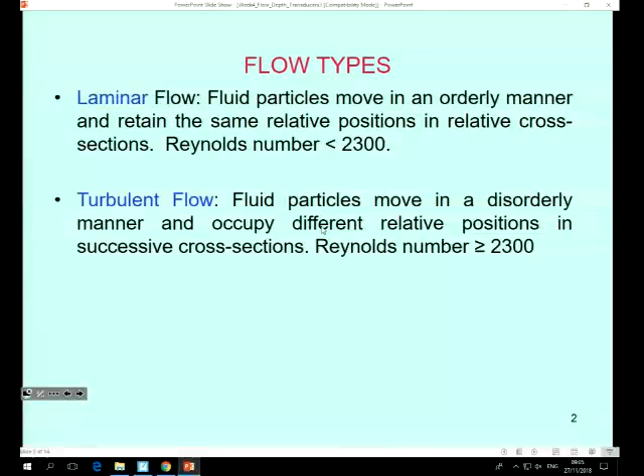And then you've also got turbulent flow. So the rig downstairs, have you used it to look at that? So you can make the rig downstairs show you laminar flow or turbulent flow. You can inject a dye. Turbulent flow just means the particles inside the fluid are moving around in a more random kind of manner, and you can see that sort of turbulence in the water. It's just like what it sounds. And that's with a Reynolds number of greater than 2,300.

And the Reynolds number is directly proportional to the velocity, the diameter of the pipe that it's flowing through, the density of the fluid, which is that symbol rho, the little p sign, and the viscosity of the fluid, which is mu. Is that always mu? Is that the right symbol? Viscosity? I didn't think it was. No, it's not, is it? It's something else normally. Okay, I don't know where I got that from. You might see that as a different symbol, that mu thing.

But anyway, just out of interest, viscosity and density are not related to each other. Some people might think a dense fluid is always going to be more viscous, or vice versa, but you can quickly remember that by thinking of oil. If you pour oil and water, obviously the oil is going to flow more slowly, so it's quite a viscous type of liquid, whereas the water is going to flow quite fast. But then again, if you mix oil and water, what happens to the oil? It sits on the top, so it's obviously less dense, yeah? So that's a good way to remember that there's not really a relationship between density and viscosity. It doesn't follow that because something's dense, it'll be more viscous. Oil's a good example of something that doesn't meet that sort of thing.

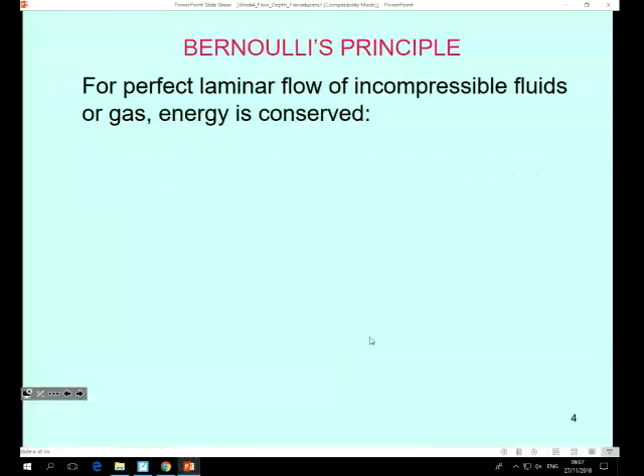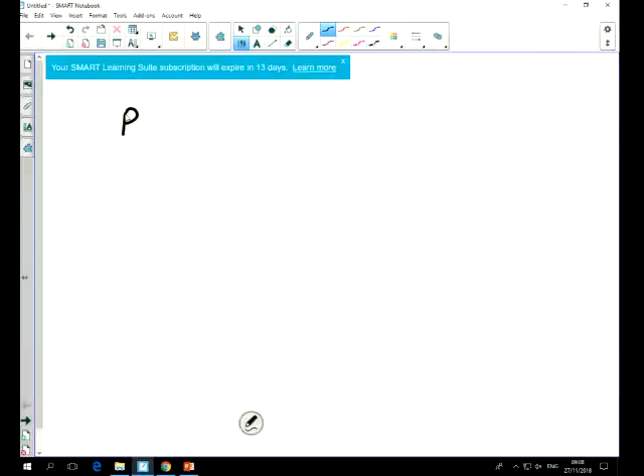I don't know if I've seen that one before. So you can actually derive Bernoulli's formula. There's a few different forms of it. That's one form, but a more useful one. So you've got the pressure energy - that's just in terms of energy - pressure energy plus potential energy plus kinetic energy.

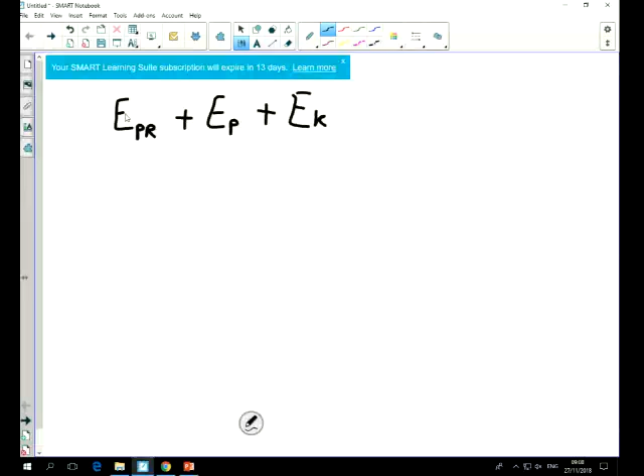So pressure energy is like force times distance - that's what we'd give you for that. So force times distance. If you think of a little bit of fluid in a pipe here, if it's got cross-sectional area A and it moves that distance, then the volume of that little bit of liquid is area times distance, isn't it? So we can rewrite that as distance equals volume over area. Is that right?

Equals area times distance. Have I done that right? Volume equals area times distance. Yeah, that's right. Yes, you could rewrite that force. So that's one equation. And then the second one is that pressure equals force over area.

So you can change that F to being that P, force over area. I think I've done that wrong. Volume equals area times distance. So to get rid of the area, you can write that like that, yeah? Force over area times area just gives you force. Then you've got the distance, which is...

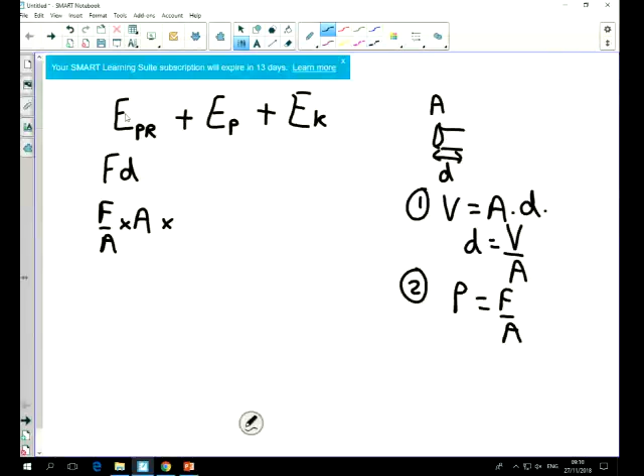Oh yeah, that is right. Sorry, volume over area, yeah. So this is all just to do with this first term here. Right, then we've got the potential energy, which we're used to seeing as mass times gravity times height. Most people know that, yeah.

And then we've got kinetic energy. Anybody know the equation for kinetic energy? Half mv squared, yeah, right. So we've got the last one, and where v is velocity this time, so I'll write it like a wee u - and that's volume, that's velocity. So the little green thing's velocity, the big black one's volume.

So then we can rewrite that. These a's will cancel out. Force over area is pressure, so that's pressure times volume plus mgh. I should have done it in red, but never mind. That's a half mv squared.

This is all to do just with the energy on one side, yeah? So let's say the energy in, pressure in, volume - the volume stays the same, so it doesn't really matter whether you're talking about the volume coming in or the volume going out, so we'll leave that. Height of the input and velocity at the input.

And then the other thing we know is that density is mass over volume. So rho equals mass over volume. So we can replace the volume, the mass parts with rho times v. So you end up with P1 plus rho g H1 plus a half rho v1 squared. So you can do that derivation - you don't really need to learn that though.

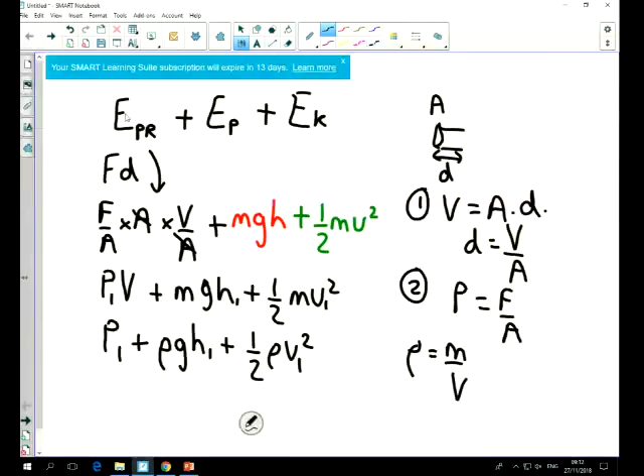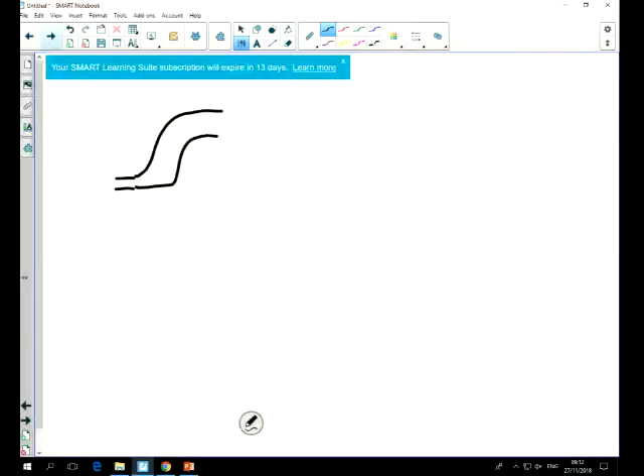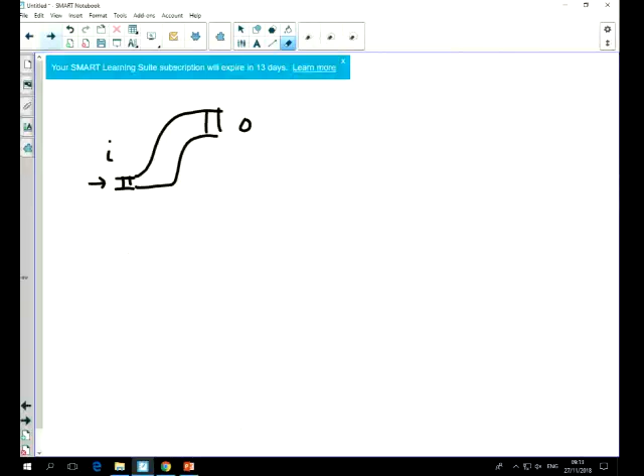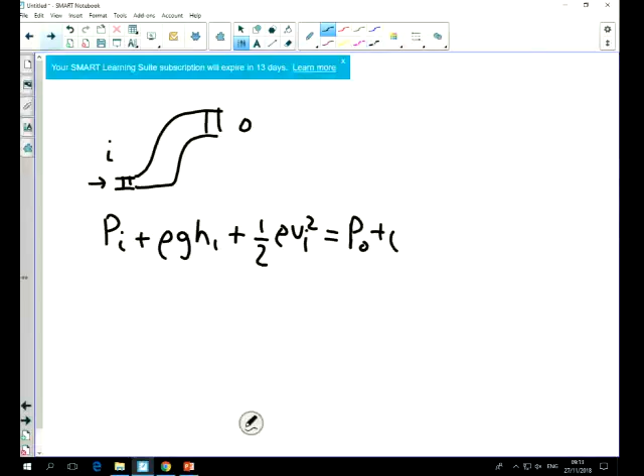But anyway, so that's on one side, and then you've got the same on the other side, and that's Bernoulli's theorem essentially. Due to energy conservation, if that's the input and that's the output: pressure in plus density times gravity times the height at the input, because obviously there's a change in height, plus a half rho v squared at the input, equals the same at the output: pressure out plus rho g h out plus a half rho v out squared. And that's Bernoulli's formula.

And that's kind of the basis on which the instrumentation for flow measurement is based, because quite often you'll be looking for a pressure difference. I'll explain that a bit better in a minute as well. Oh right, yeah, you know more about that anyway, won't you? You'll have done loads of this stuff.

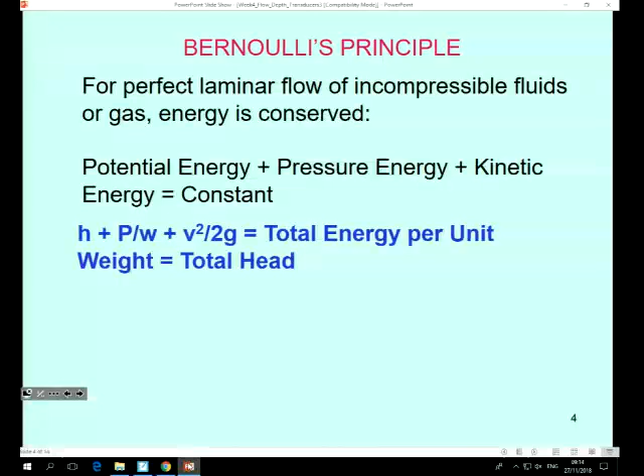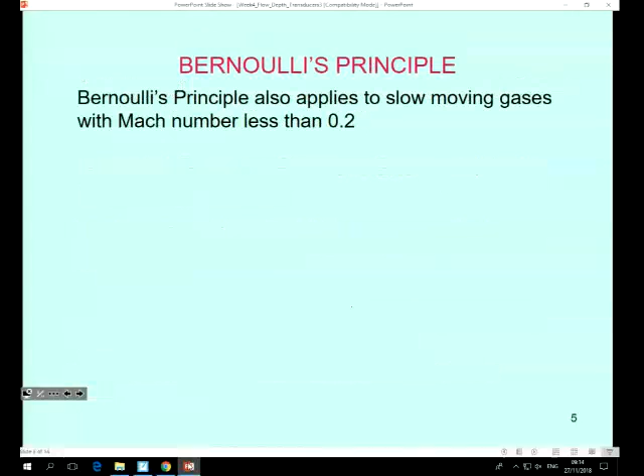It also applies to slow-moving gases, but the speed has to be below a certain Mach number, less than 0.2. I can't exactly remember what Mach number is... it's the speed of sound in gas. That's 1 Mach.

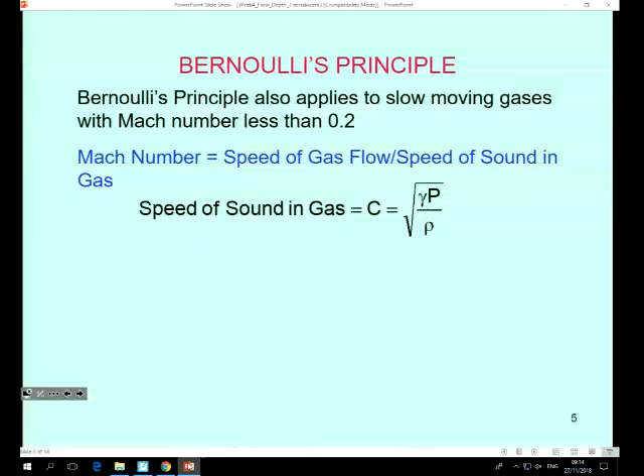Anyway, we don't really need to know too much about this stuff. It's just explaining the units that are used. Pressure's measured in newtons per metre squared. That's the same whether it's liquid or just general pressure. We know that already.

This little symbol here is gas density, so air has a density of 1.4. That's just to do with how many atoms there are in a certain volume of gas. When you're talking about density, you're always talking about number of atoms in a given area.

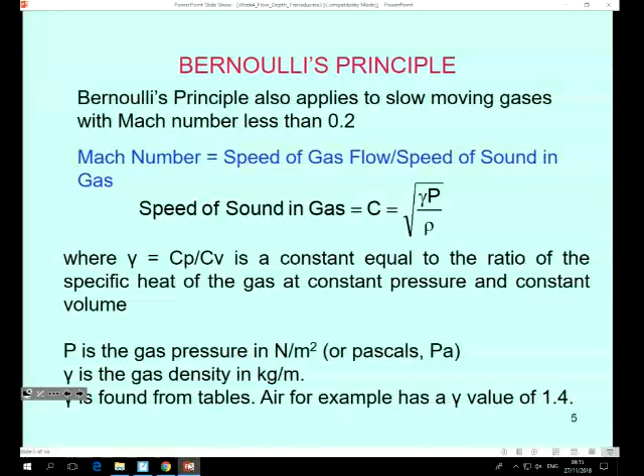So we don't really need to care about that, or this. I'm not very sure why all this stuff is in the slides, but just so you're aware, Bernoulli's formula only applies to laminar flow, slow speed, so Mach number less than, I think it was 0.2 or something, and no friction. So no friction, but of course there usually is friction.

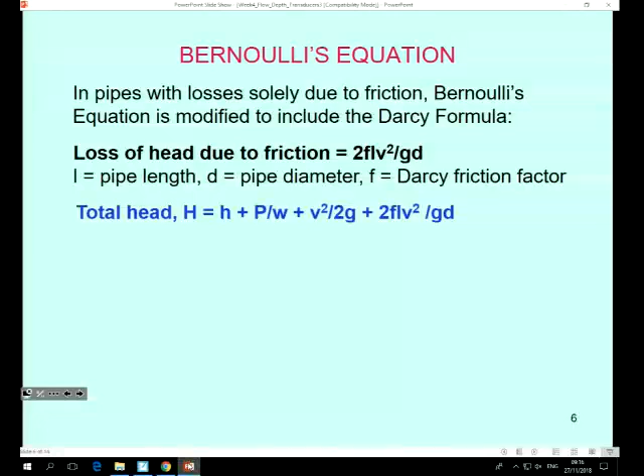If there is friction in the pipe, then you have to add this Darcy formula. People doing ventilation systems or cooling systems probably have to take all this into account, but for this course, you don't really need to because you're not expected to be designing flow systems, just instrumentation for them. So there's a bit of friction, and you obviously just need to add that into the formula for the total energy. I don't think we need to know too much about that.

What's really interesting about Bernoulli's principle, and it might not be instantly obvious, is that a fluid flows faster in a smaller diameter than it does in a larger diameter. That's kind of counterintuitive - I think most people would think it flows faster in the bigger pipe because there's more area for it to go quicker. But that's not true, it flows faster in the smaller area. And because of the energy conservation thing, that also means the pressure drops in the smaller pipe and increases in the larger one. You wouldn't expect that, but that is what happens.

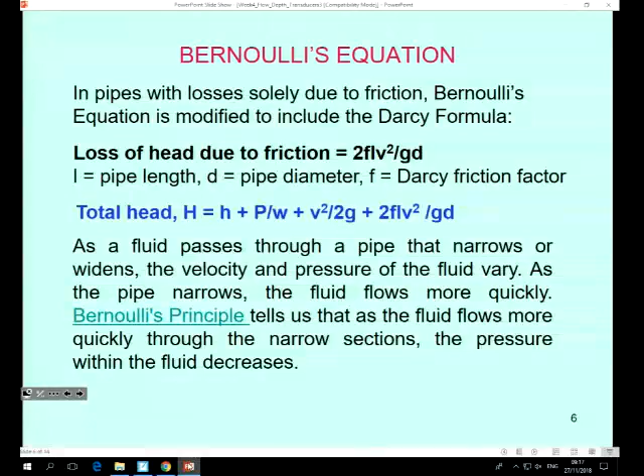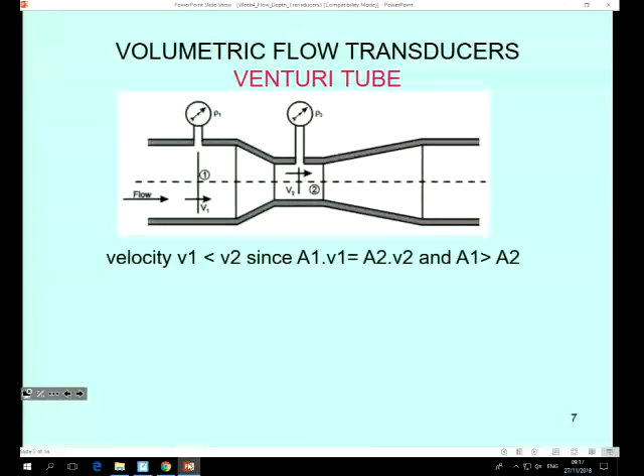So that's how a lot of these flow measuring instruments work - you can put a small constriction in the flow and measure the pressure difference between the large area and the small area, and get a very accurate representation of the flow. V1 is velocity 1, V2 is velocity 2, P1 pressure 1, P2 pressure 2. That's just explaining what I said.

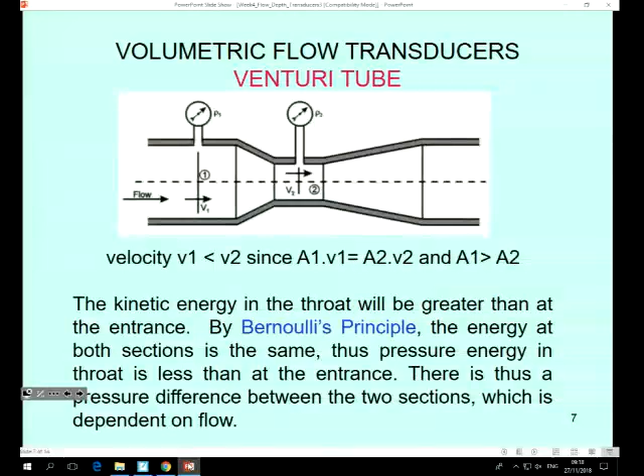So you'll have seen these, like differential pressure meters and things like that. I'm sure there's probably loads of these at Dounreay, because a lot of what you're doing is to do with flow. There's lots of different ways - you've got your electronic differential pressure cells, you've got your manometers which you can just look at. There's other ways of putting the restriction in, things like orifice plates and stuff like that. I've got quite a good slide about that.

There's these Pitot tubes - these were used in airplanes quite a lot in the past. It's just the same idea, using two different diameters to measure the pressure between them. I think there was a plane crashed in South America - they reckon it was because these Pitot tubes froze up, so the airflow couldn't go through them. That's still the same idea.

You can rearrange Bernoulli's formula to get this equation here, where the velocity squared is equal... that's the difference in velocity between the two pressure areas. So the difference in velocity squared is equal to 2 times the difference in pressure over the density, rho. Sorry, rho is density, yeah, that's right, I was right.

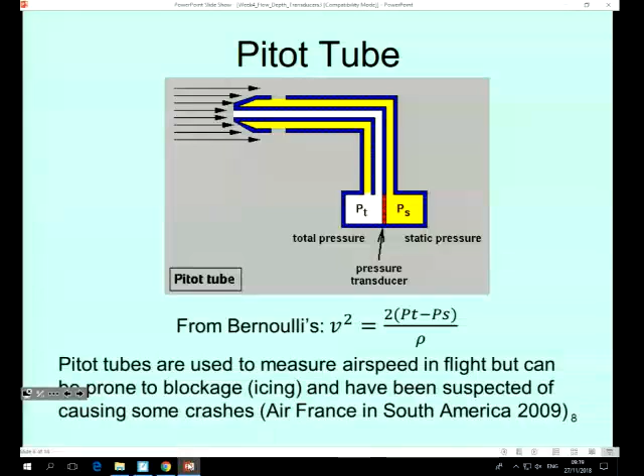Okay, so that's a typical manometer type of one. I don't know if anybody's ever seen them, I'm guessing they're quite old-fashioned now. We used to have some of these downstairs, I used to bring them up, but they've been thrown out now because nobody used them. So you can see how you can measure pressure difference there. I've got a better thing for showing you.

So this is just telling you that there's a direct relationship between the flow rate, Q, and the difference in pressure. And that K is related to the constants, to do with the pipe diameters and things like that.

Right, and this is talking about volumetric flow. I'll talk about that as well. There's some other methods of defining flow. Probably the most common is volumetric flow, so that's the amount of volume passing every second. But you have different instruments for measuring different types of flow.

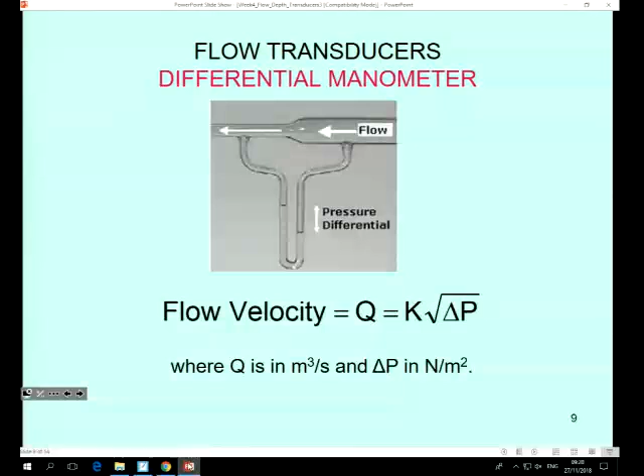I think I'll show you the wee thing now, because the little RLO thing is more interactive and a bit more interesting. Does anybody have any questions about any of those? No? Quite straightforward, isn't it? Okay, straightforward, but you need to remember.

So this is just one of these Wisconsin Online things, which I always think are quite good. I should say, if you've got any problems with any subject and you want a wee bit more visual information, WISC Online is quite good. They've made loads of these little reusable learning objects, they call them. I think they're quite good for learning, because they've got good pictures and things to show you what's going on.

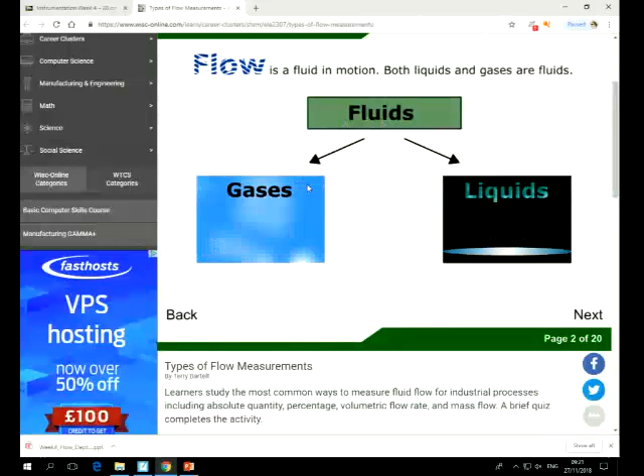So just a wee bit about flow there. We're talking about fluids, but they could be gases or liquids. Yes, the definition of fluid includes gases as well. The thing that causes flow is obviously going from a high pressure to a low pressure. You don't get any flow if there's no pressure. Now the pressure could be something like a pump pushing the fluid through, or it could be gravity. Gravity also gives you a pressure. But you won't get any flow if there's not a pressure of some kind being applied.

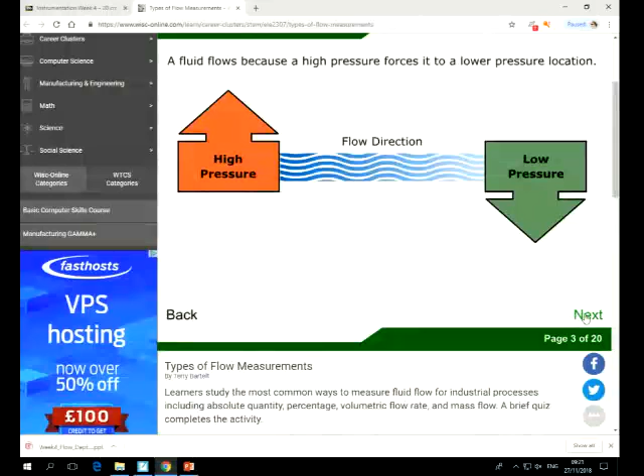So that's just a wee thing, that's just what I said. It could be either pressure from a pump, or it could be gravity, which is also pressure.

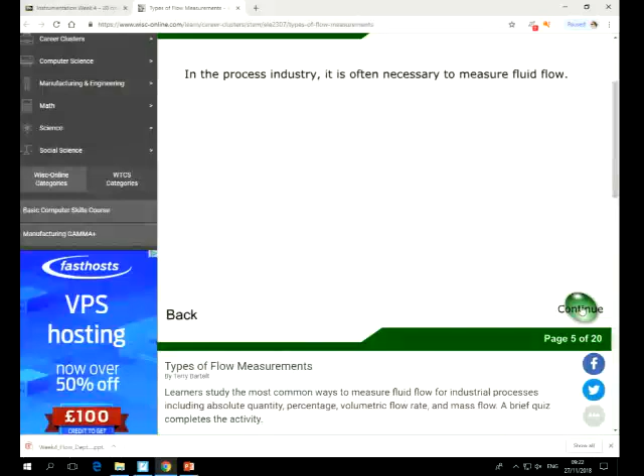So obviously you need to measure flow quite a lot for loads of things, everything from your car cooling system to your big process industries, pipelines, oil pipelines - what's the flow rate through them. Mostly I've been involved with cooling units, so that's the thing I'm most aware of, but there's obviously a lot of other fluid flow as well besides just cooling fluids.

So we've got all these different types of measurements. Like I was saying, there's different types of flows. You've got absolute quantities, which doesn't bother about time, it's just measuring a volume flowing from one side to another. You've got percentage flow rate, which is what it says, it's percentage compared to our normal flow rate. Volumetric flow rate, which is the one we looked at, which is volume per second or volume per minute or whatever. And then you've got mass flow rate, which is mass per minute or mass per second.

Okay, so you've got different instruments depending on what you're measuring. Did you know that you had different measurements? That's something you've come across before? No? Okay, so you've got absolute ones, which are quite straightforward. You just fill up a quantity and then release it, and you know how much has flowed if you do that. So that's the absolute ones.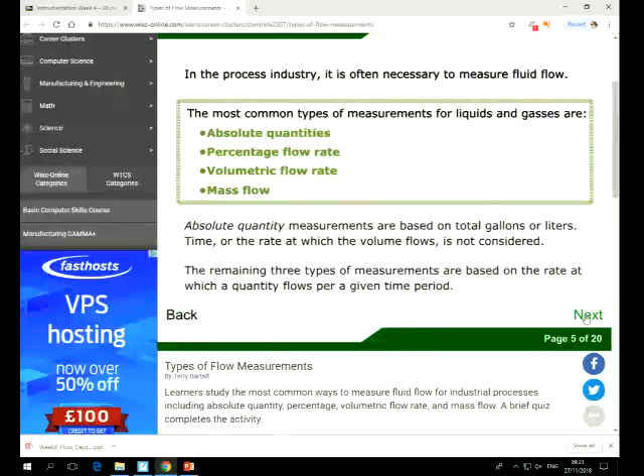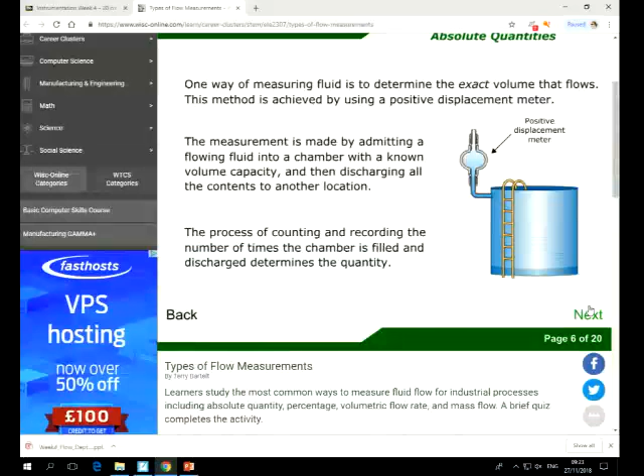And the rest are based on the rate of time, or use time as well. So it's quite straightforward. If you're doing the absolute quantities, you can fill up a tank and then discharge it to another location, and you know how much you've discharged, yeah? And there's quite a lot of flow meters that work on that principle. I think the ones you have for your gas in your house do work on the same principle. So this one does - it fills up this volume here and then discharges it through there, and you can obviously measure that volume, or you know what that volume is.

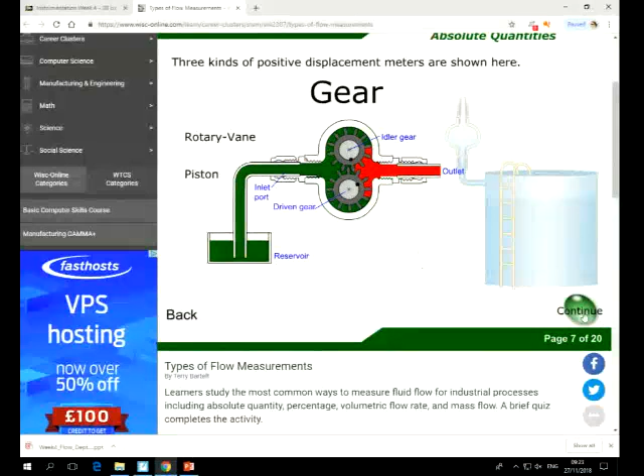Same with that one as well, it's also doing the same thing - it's a specific volume coming in here and then going out there. And that's just the same idea with a piston. So like I said, these are quite common, I think, for gas measurements, but maybe not so much for liquids.

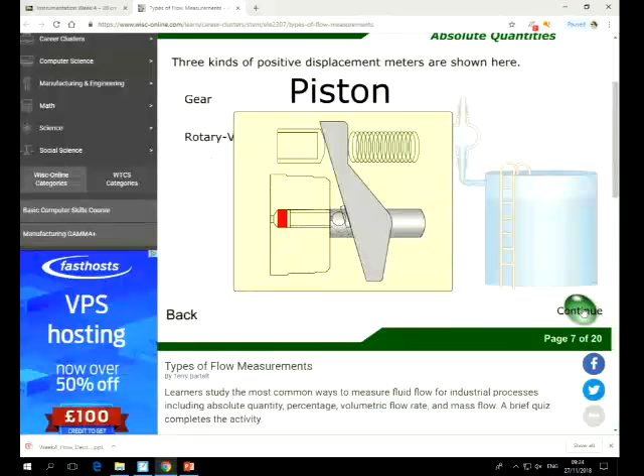Just got some applications there, measuring quantity of additives to add, or transferring something between two tanks. Obviously you don't want the second tank to overflow, so you need to know how much you're actually putting into the next tank.

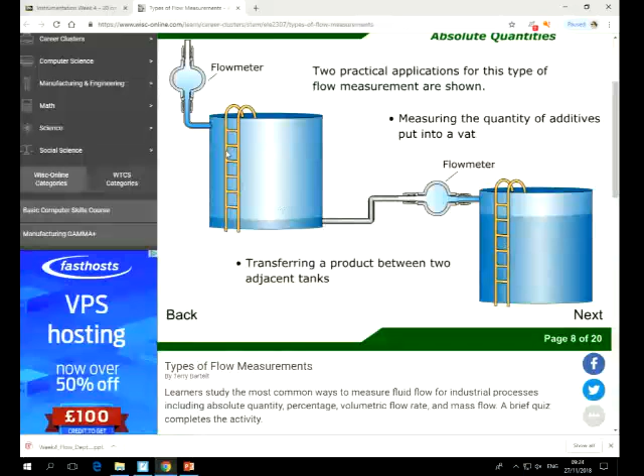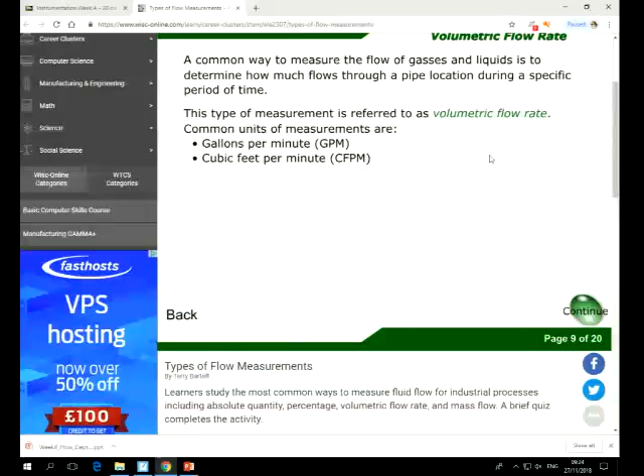And then the other way, which is probably more common, is measuring over a period of time. I think this must be American, because I don't think we use gallons per minute or cubic feet per minute. We probably use meters cubed or millimeters cubed per minute or per second. But obviously there's a whole range of different measurements, depends what you're talking about.

So some applications prevent a high flow rate. It could also be to assure a specific flow rate, as I say, again, for cooling.

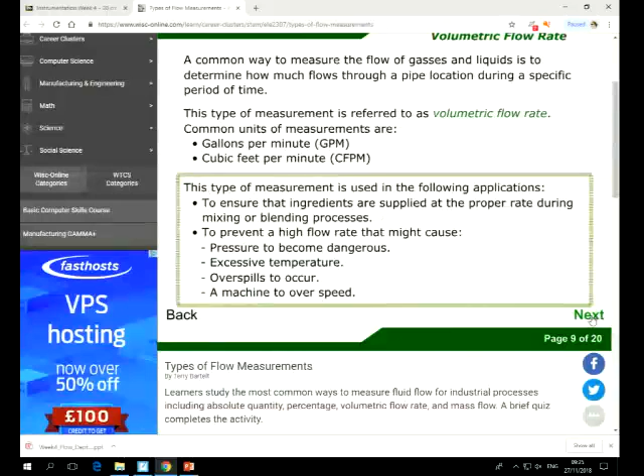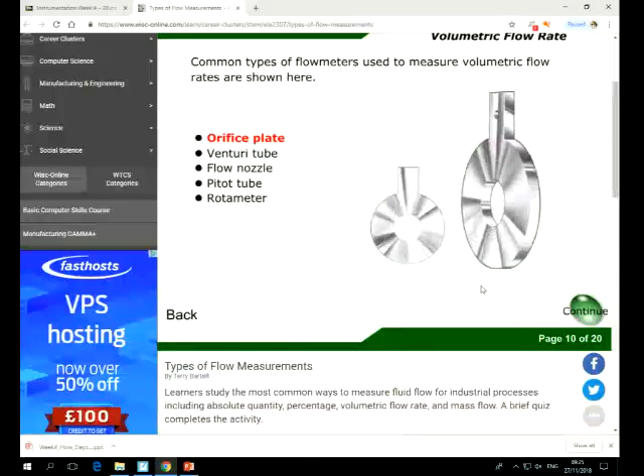The more common one is the venturi tube. I suppose orifice plates are quite common as well. The nice thing about an orifice plate is it doesn't require a length of pipe - it's just something you can insert into the pipe, which is good. The disadvantage of these sort of things is that you have to actually access the fluid. So if it's a contaminated fluid or a corrosive fluid, these methods are not so good, because you're going to have to actually insert the flow meter into the fluid.

There are other ways which don't involve contact, which are a bit better, though they do depend on the type of fluids. You've got your electromagnetic flow meters, which use magnets to measure the magnetic fluid passing through. Or you can have two magnets, one at each side, and they measure when the fluid passes one bit and when it passes another. But the problem with them is you need a specific type of fluid to do that - you need a magnetic fluid. So I suppose these are more common.

Oh, sorry, I didn't mean to do that. These are all working on the pressure - Bernoulli's principle theorem.

You'll have seen these ones downstairs, possibly, the rotameters. They're just a visual display. So what happens is the water or liquid moves up and down due to the pressure, and you can measure the flow rate based on the height. Obviously, more pressure pushes it higher, and less pressure pushes it lower.

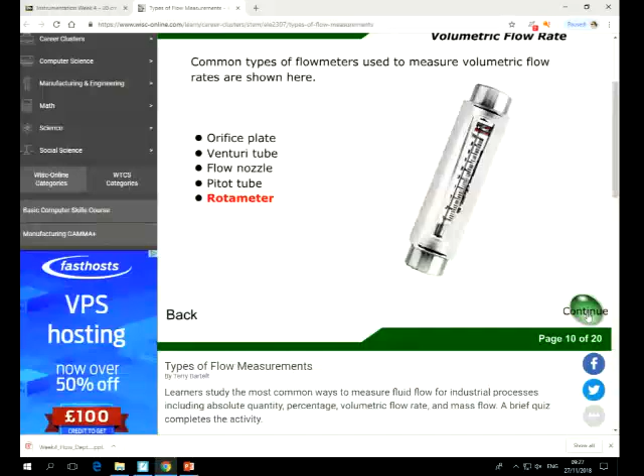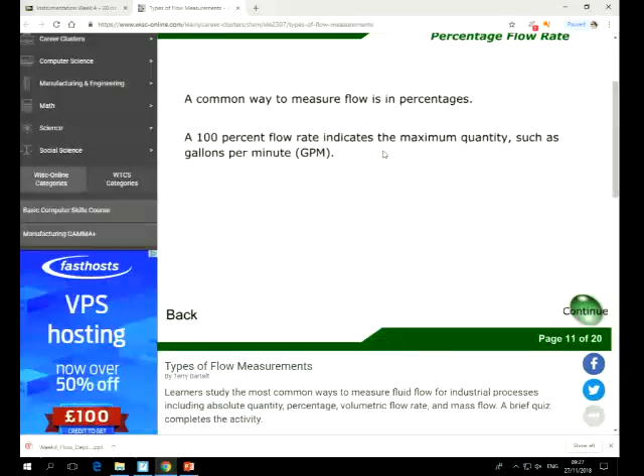So the other way is to measure as a percentage, so you can tell if a pressure has dropped or risen quite quickly by looking at the percentage flow rate. This one's in gallons per minute, which is a bit odd, but if you set your reference, you can measure compared to that. So this one's measuring 50%, which would be 250 gallons per minute. I think that's straightforward, no question there, I don't imagine.

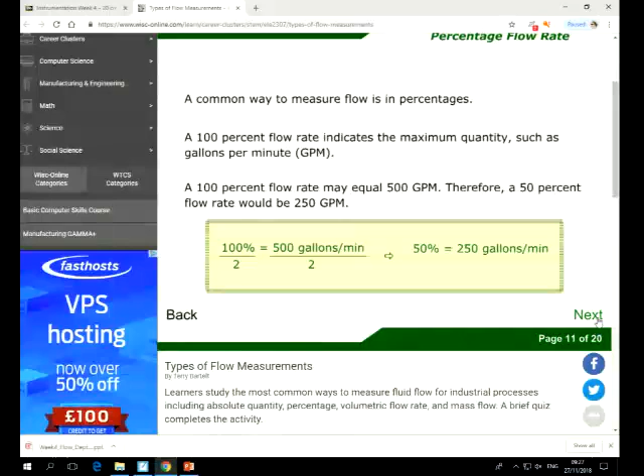And then the other type that's used is mass flow rate ones - they're based on the weight of material.

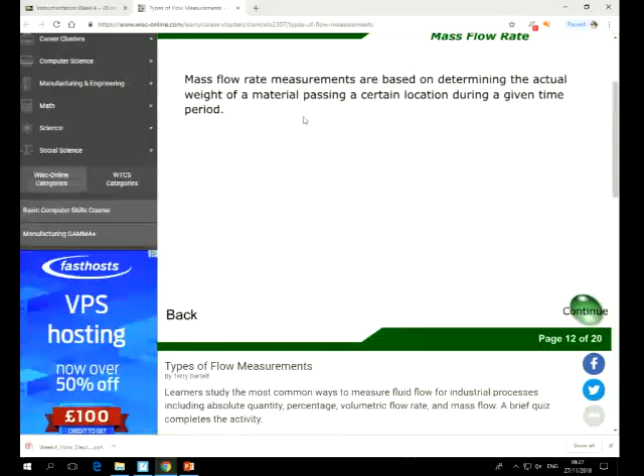Oh yeah, this is quite a good one, the Coriolis meter. This is quite nice because you can use it for dense fluids, viscous fluids, or really easy flowing fluids. What happens is a kind of twist is introduced once something starts to flow through it - I think I might have a video of this actually. The twist is proportional to the speed of the liquid flowing through it, so you can use sensors to detect how much that's twisting and measure it over time. I think the video will show it better, and that will give you an indication of how fast it's flowing.

And then there's also, if you just set it vibrating and look at the frequency it vibrates at, that also gives you a measurement of the density of the fluid as well - or is it the viscosity? I'm not sure, I always get them confused. But let's see if I've got the video.

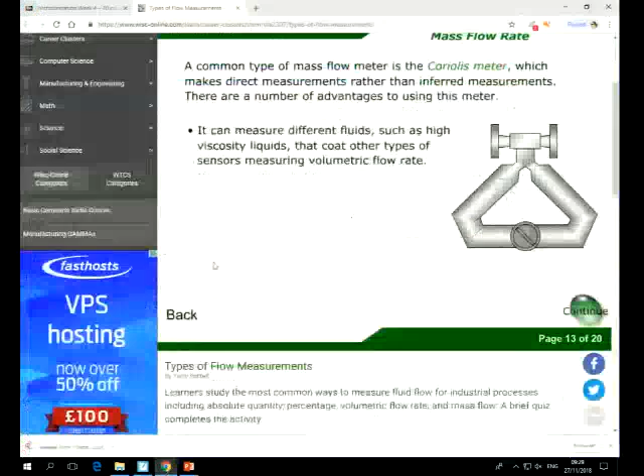This one is quite a nice video, this is from Endress and Hauser, who are a quite well-known manufacturer. I'm not sure if the sound will work, but you can see the pictures.

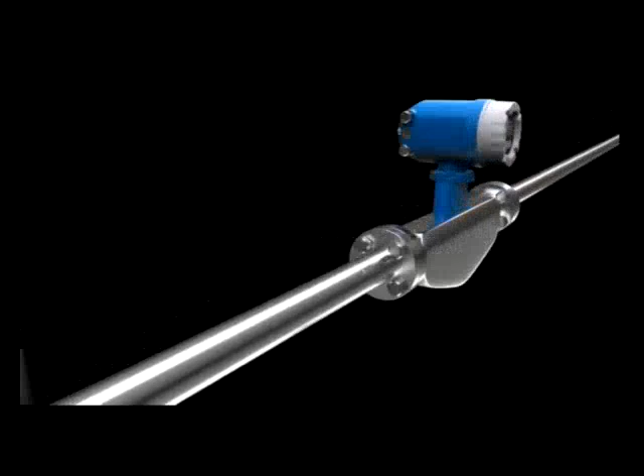So you'll have seen these, you see these quite a lot. These types of flow meters are quite common.

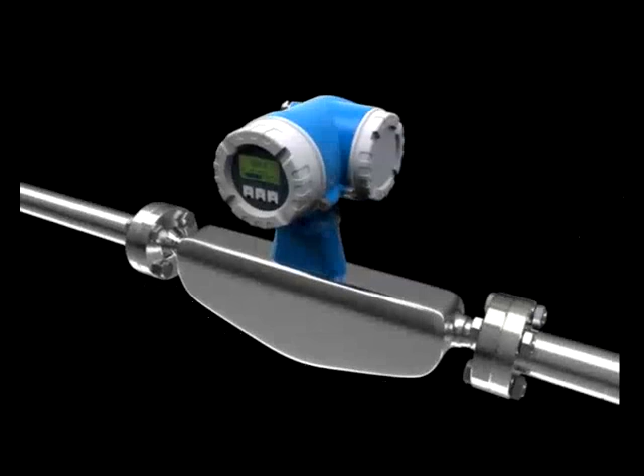Do you want the sound on? It's a bit odd without the sound. I'll try putting the sound on. Are you okay with just watching it?

We get a picture. Yeah, it's more just so you can see what's actually going on.

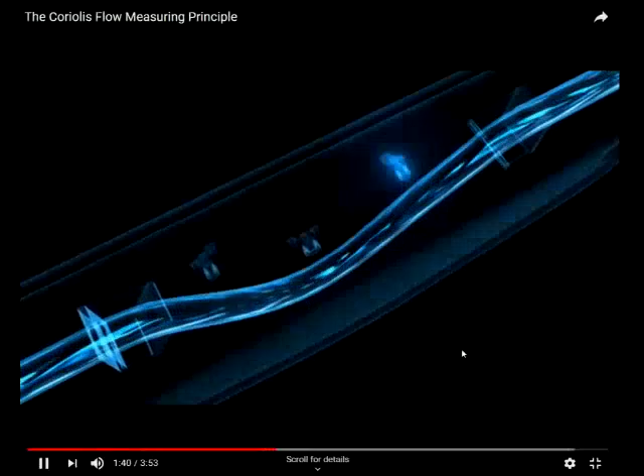So what they do is they set that to vibrate, or to oscillate a wee bit, like that. That wee thing that's firing the pulses there is just making that do that. And you can see when there's no flow, if you set some sensors to detect the sort of twist, they just flash in line with each other. But as soon as you get some flow, the pipe starts to sort of wiggle.

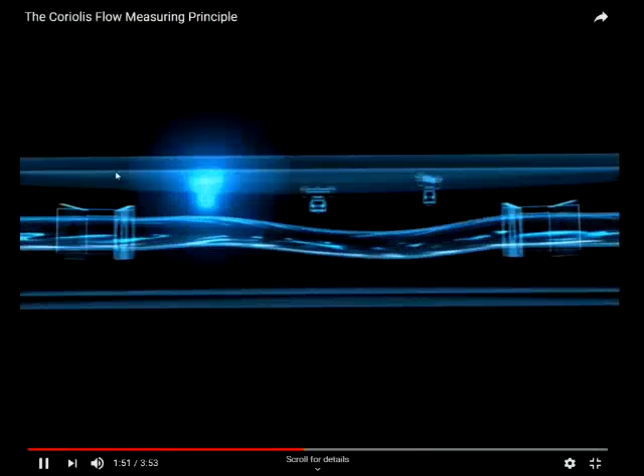Then you get a difference between when these sensors are detecting it, and you can measure the time difference. That will be proportional to the speed at which the fluid's flowing. It's quite clever. And it's all to do with the Earth turning and gravity, the reason that happens.

Of course, it all happens inside the instrument. You don't really need to worry about what's going on.

But if you're just interested in fluid density, you can just do a measurement like this, without having it flow. The speed at which it oscillates will be dependent - obviously, the more dense it is, the more slowly it will oscillate. So that's another method. You can make both measurements at the same time, but I'm guessing you'd have to stop the fluid from flowing to do the second one.

That's enough of that, I think.

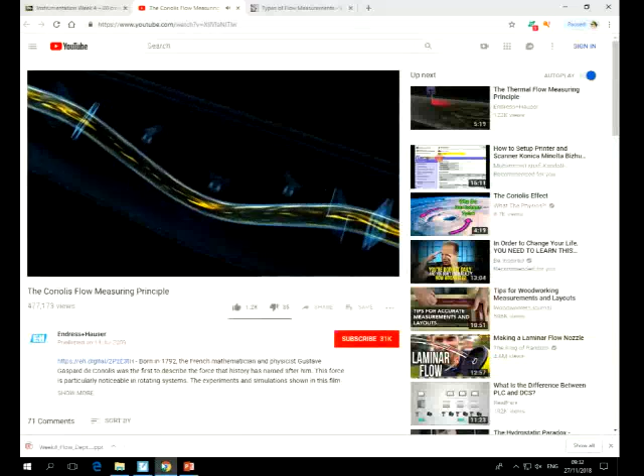Okay, and then some other methods. You've got things like your turbine wheels - you've probably seen them in various systems. The principle of that is just a little turbine, it turns proportional to the speed at which the fluid's going through it. So you can detect how many rotations it does in a certain amount of time, or you can measure the time for one rotation, and that would give you the flow again.

We've got some of them downstairs, we use them quite a lot. The disadvantage of that, obviously, is you've got moving parts in a liquid. And again, if it's a corrosive liquid, it's not going to last very long.

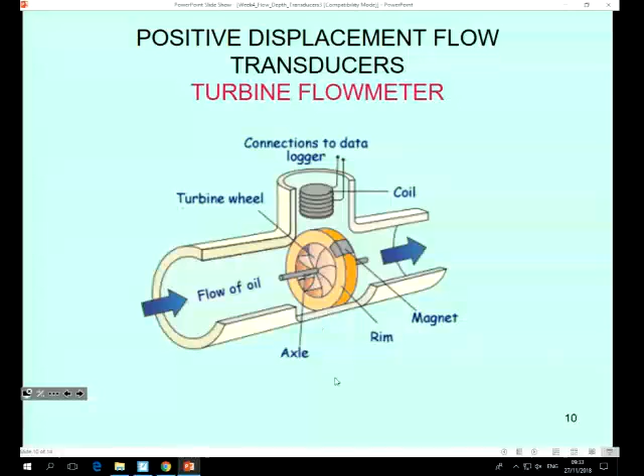But you've got the positive displacement type. That's the one we looked at at the beginning.

Ultrasonic ones, they're probably pretty common. They're nice because they don't actually go in the tube, in the liquid - they're fitted on the outside, so they don't involve any requirement to cut open the pipe. You can just fit them.

And all they're doing is the ultrasonic waves bounce off the atoms in the fluid, and you can measure the difference between detecting them here and then detecting them there, and that's obviously proportional to how fast they move through.

They're used quite a lot. I was telling you about Hoy Pumping Station, they use a lot of those ultrasonic ones. They also use ultrasonics for depth sensing as well. That's the Coriolis one that we just looked at - that's a similar type anyway. And that's the electromagnetic one I was talking about, but you do need a fluid that's got some magnetic qualities to use that one.

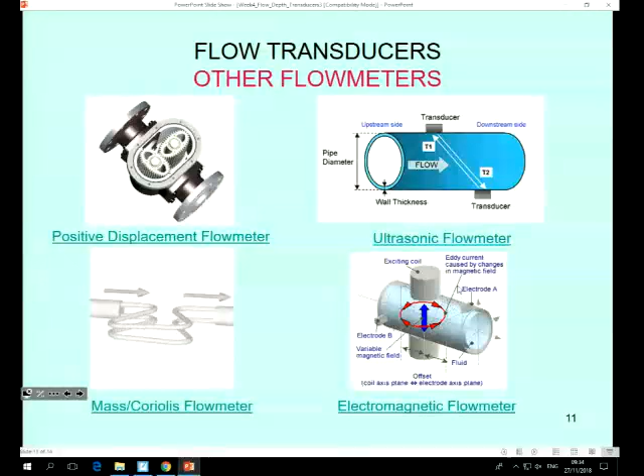Okay, so that was all on flow. Was there any questions? Anybody come across any other types of flow meters? No? Not with where you worked, you might have seen some others. What's the most common kind? Pitot tube, and differential pressure.

Is it? Right, yeah, oh okay. Yeah, I thought it might have been the Coriolis ones. No, never seen one of them. Never seen one of them.

Right, okay, because they're one of the more reliable ones and more accurate as well. Also manometers - yeah, I'd imagine manometers are probably quite common, because most of what you're doing is measuring on the spot, isn't it? Really, you're not really doing it automatically. Well, I suppose you can use an automatic sensor with a manometer as well, but you'd have to detect level - you'd have to do a combination of level and flow.

So ways of measuring level, probably the most common is ultrasound. Even nowadays - they used to be quite expensive, but nowadays they're actually quite cheap. I think even some students were buying them last year for projects. They're only about £30-40 for a reasonable one, so it's a pretty common way of doing it.

What's nice about that, again, is there's no contact between the meter and the fluid. So again, you've got that - that's quite a big advantage, I guess. And they're also quite accurate as well.

I'm not sure how good they are if the fluid's very turbulent - I think if there's a lot of spray or turbulence, they sometimes can give you a false reading. And I'm also not very sure if they're very good with fluids that are quite gassy, because I think sometimes they can bounce off the wrong thing. And also solids - I mean, they're used in silos and things like that as well, but I guess it might depend a wee bit on what the actual material is as to how good it would be.

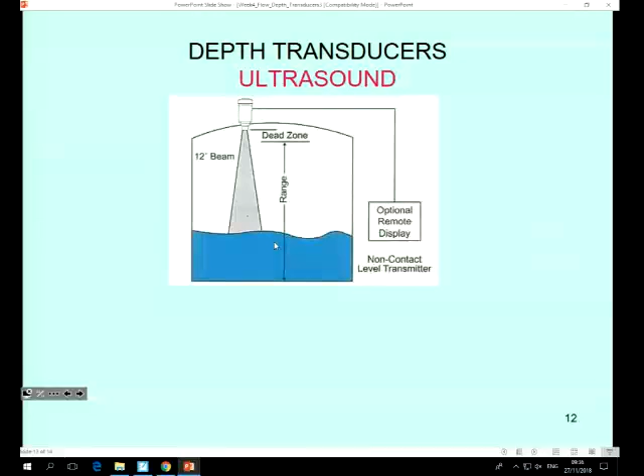So obviously the idea of that is it just bounces - you send the ultrasound signal, it hits the surface of the thing you're trying to measure, bounces back, and you can measure the time it takes to do that. Similar to a sort of radar type idea. Pretty easy really, that's just the equation there: the time is 2 times the distance divided by the speed of sound, because it's ultrasonic.

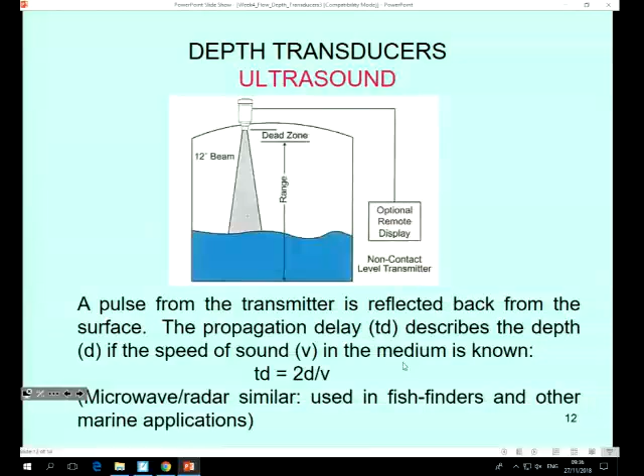So that's quite common. Another way I've seen them is where you've actually got two plates in a sort of plastic tank. I think that might be the way they work in your car petrol tank - does anybody know? It's quite an accurate way of doing it. Nobody know? Nobody do any mechanics on their own cars? No? All right, fair enough.

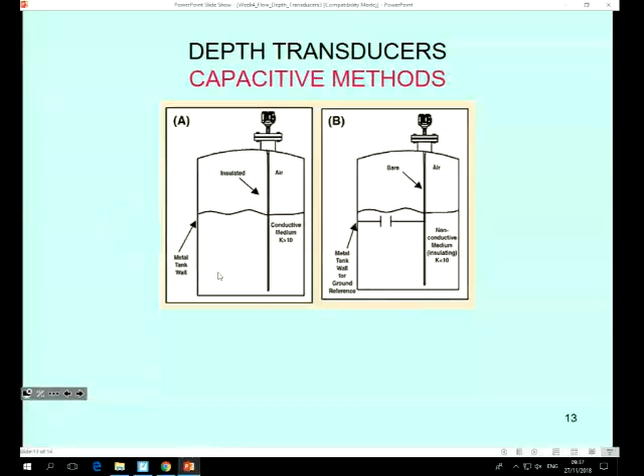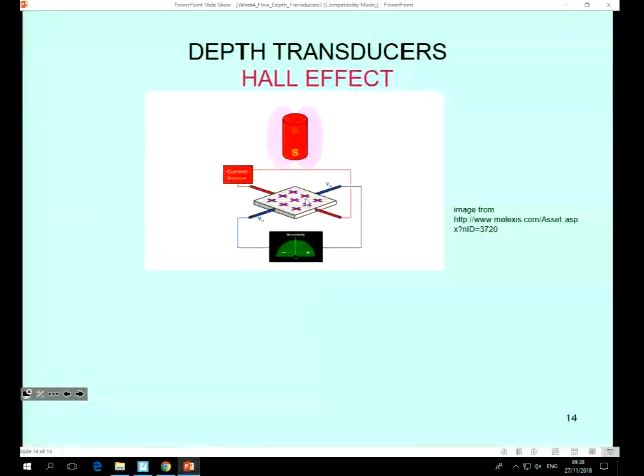And then I mentioned these Hall effect transducers before. We used to have a tank from Vulcan which used these. Basically what happens is as you bring a magnet towards the material, these charges in the material are displaced. So when you put a current through that, it'll kind of, a bit like the Coriolis tube, bend and wiggle - the current will actually be pushed either to the bottom or pulled up to the top. And that produces a voltage across the material as well, so you can measure the voltage, which is what's happening here. I used to have a little picture that showed you that, but I think that's gone. You can look those up anyway.

The way the level thing used to work, it came from Vulcan - you used to have a whole load of these little sensors all the way up, and then you put a magnet inside the tank, and as the magnet went up and down, it triggered a sensor one at a time. What was nice about that is you could use it in explosive environments and things, because there was no contact and no sparking or anything. The magnet was just going up and down by itself, and these things were detecting it - there was no contact between them in any way, so that was quite good. It was designed specifically for that, I think.

Okay, that's all there was for today. There wasn't too much today.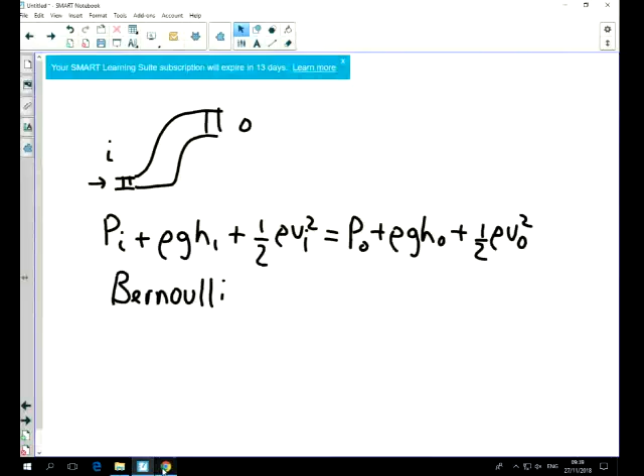So that was... I'll get this through that in a minute. I had to rewrite them last week, actually, because I deleted them by mistake. So I hope you appreciate that.

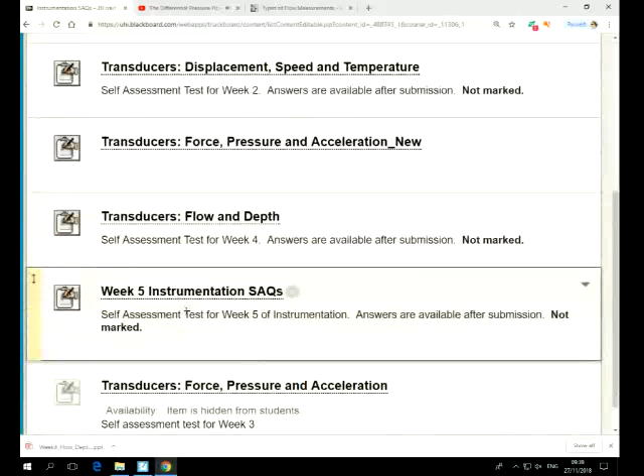So what were we on? No. We did those ones - oh, the temperature ones are out of order. Oh, temperature there. I'm going to quick look through these. I'm not going to do the calculation ones. No, I'm not going to do the calculation ones, we can just do the other ones.

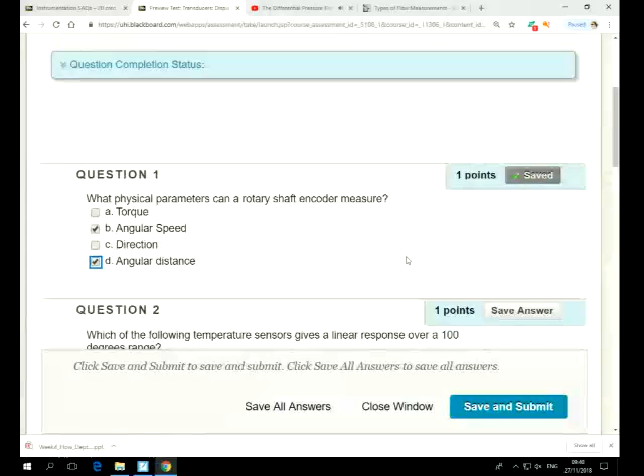So what physical parameters can a rotary shaft encoder measure? Angular speed - you measure speed. You measure anything else? Yeah, you can measure direction if you've got enough slots on it, yeah? Yeah, okay, so we go with direction as well. I think that's right, you can see in a minute.

Which is a linear temperature response? PRT, yeah, and probably this one as well. I would imagine. These two definitely not - they have millivolts in it. Yeah, what can you measure with an LVDT? Amplitude, or how do you measure with an LVDT? So you measure displacement, but what do you use for that?

So that's the thing with the transformer, with the coil that moves up and down to change the transformer ratios. Phase definitely, and probably amplitude, because as the coupling gets bigger and smaller, the amplitude coming out will get bigger and smaller as well. Yeah, so amplitude, I think that's right.

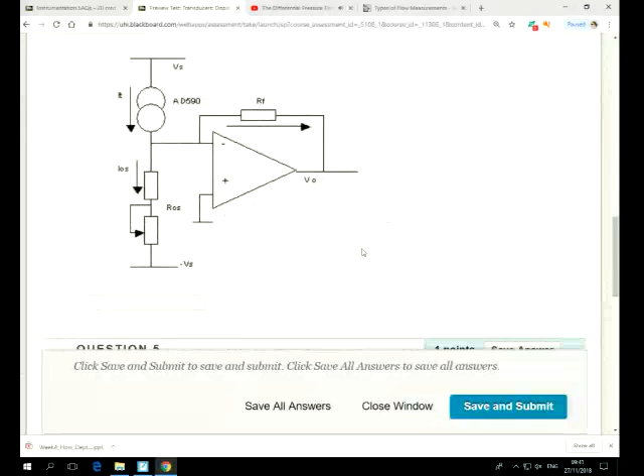I'll not do the calculation ones, you can have a look at those yourself. Yeah, we'll just give them a miss, I think. So do make sure you do them, because these are the sort of things you'll get in the exam, yeah?

In the exam, all of the calculations are electrical ones. No, most of them are control - there's 70% control, 30% instrumentation. But you mean like there's a Bernoulli's formula?

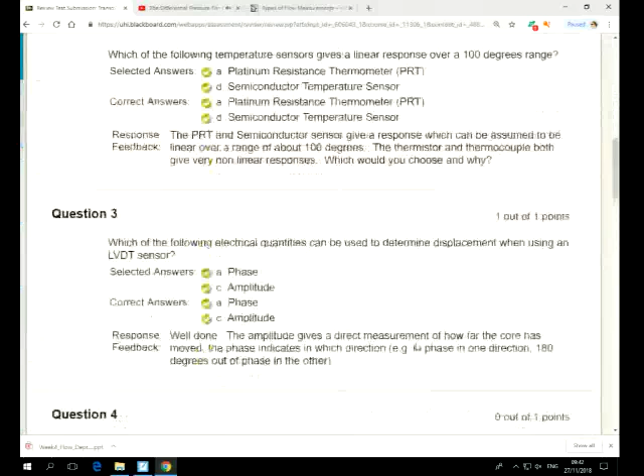Right, so you got that one right, got that one right, got that one right. I would imagine these ones show you how to do the calculations if you can't do that. I'd certainly make sure you can do the electrical calculation, because even if there is a Bernoulli's formula, it's only going to be one question.

Instrumentation is quite an electrical subject.

Okay, do you want to see the other ones, or are you not really bothered? Yeah, just go on, will I go through the other one as well? Oh, aye, it's very long.

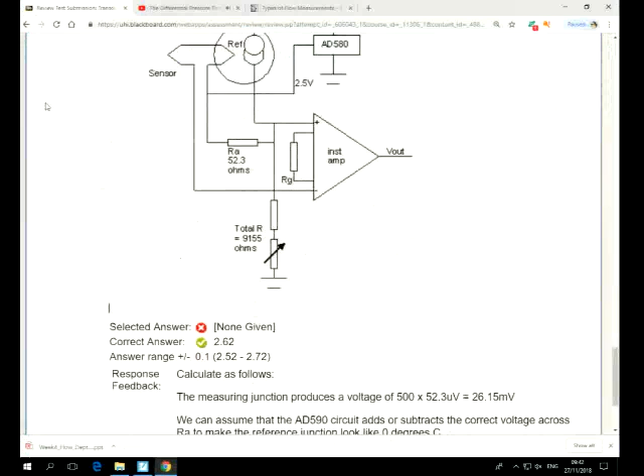Make sure you can do that one, guys. Aye, it was on practice ones months ago, you know what I mean? Was it? Right, yeah. Okay, I've forgotten what the formula is. I think it's 1 plus 2 Ra over Rg.

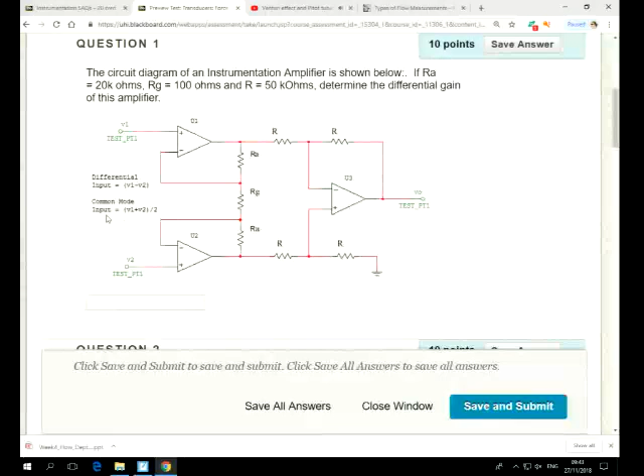That gives you the gain. The common mode gain is always 1 for these type of amplifiers, so you can work out your common mode rejection ratio just by the gain you calculated divided by 1, which is obviously just the gain you calculated, and 20 times the log of that gives you a common mode rejection ratio in decibels. So you can see that later.

Right, why is an instrumentation amplifier better than a normal amplifier? There's a few choices here, a few answers as well. So, common mode rejection ratio - higher or lower?

What's better? Higher. Higher, yeah, good. Was that just a guess? No, I know.

What about input impedance? Do you want that to be higher or lower? Lower impedance? No, the answer's higher. If you think about it, a lower input impedance is the same as a lower resistance, so that's going to load your input signal more. What you want is a really high resistance so it doesn't have any effect on the input coming in. So that's definitely higher, that should be higher.

It's got a lower offset voltage. Yeah, that's definitely right, because offset's bad. We all know about offset. Yeah, you had a big offset in your coursework. Don't talk about your negative offset.

What about open loop gain? You can probably guess that one. Lower? No, actually higher. The higher your gain, the bigger range of signals you can take in, the more bandwidth you can use. So that one's higher as well.

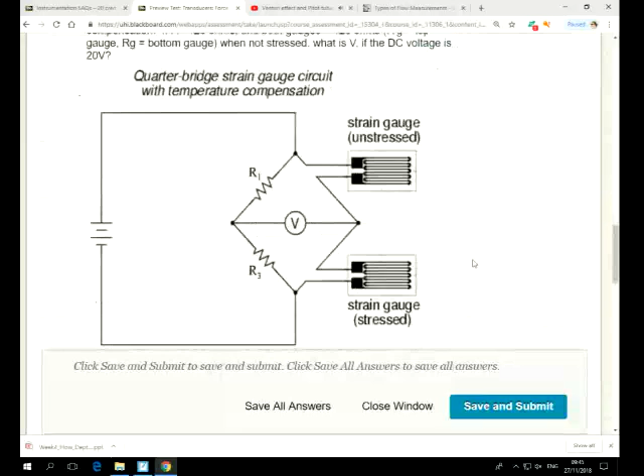So make sure you go look at the calculation ones, just because I'm not going through them doesn't mean they're not important. I had it the wrong way around - it's 1 plus 2 Ra over Rg.

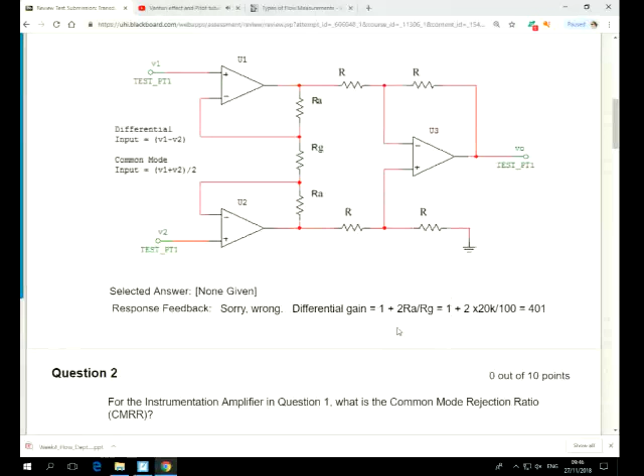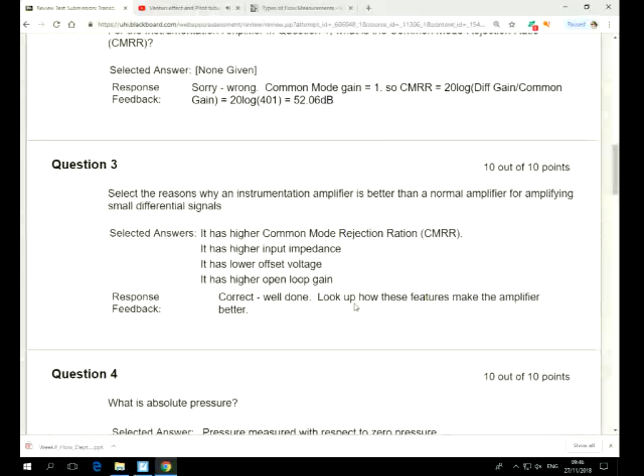I would memorise that if I was you. Good advice. Right, yeah, that one we talked about already. What was that again? Question 1 on what's this called? The instrumentation amplifiers - question 1's an instrumentation amplifier.

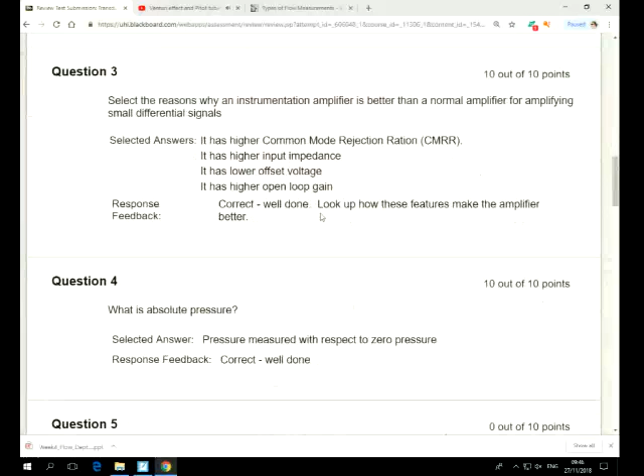Yeah, we got that right. Do it - if you get it wrong, it's... got that right. And then the other ones are all calculations, so you can work them out for yourself.

Okay, I think that's probably enough. You want any more information? Right, no. Anybody got any questions?

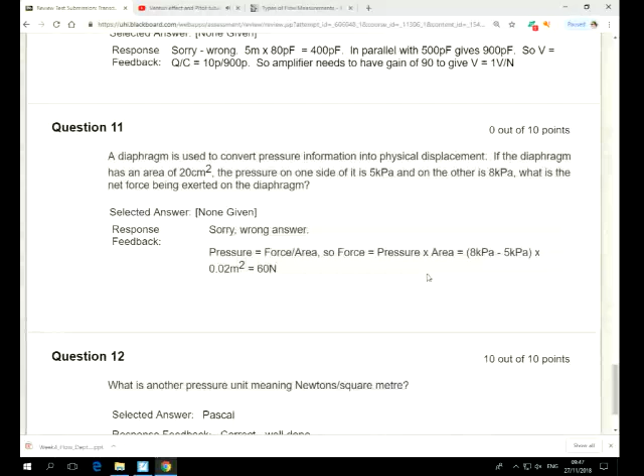This call has been disconnected. Thank you for joining.